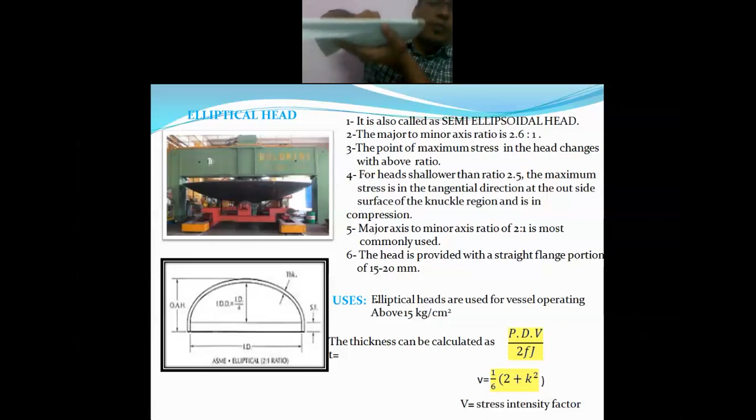In this figure, there is a big machinery which is provided, which is going to put a dishing that has been done. That means for a flat plate, I am going to hammer it continuously so that it is forming a dish, a curvature. So this dish is formed by continuously pressing it.

Similar videos are available on the net, and I request all of you to watch these videos.

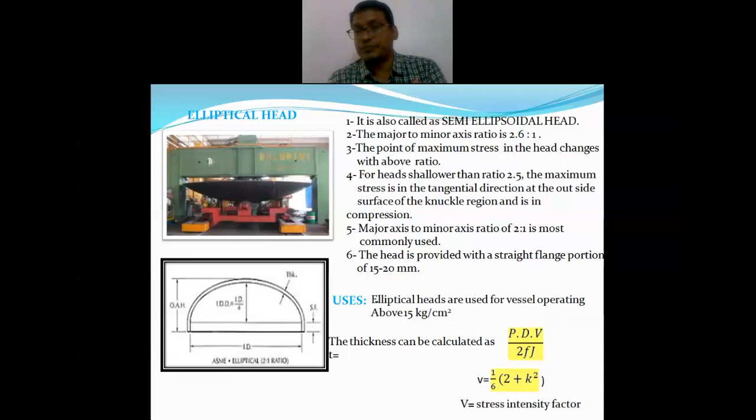The questions that can be framed, I have talked about in this slide. 4 to 5, even 4 to 7 questions can be framed on a single slide, so you have to study that in detail.

Now next, hemispherical head. It provides the maximum volume and requires just half the thickness of a cylindrical shell, that is PD upon 2FJ versus PD upon 4FJ. So the thickness calculation for hemispherical or spherical vessels is PD upon 4FJ, while for cylindrical vessels it is PD upon 2FJ.

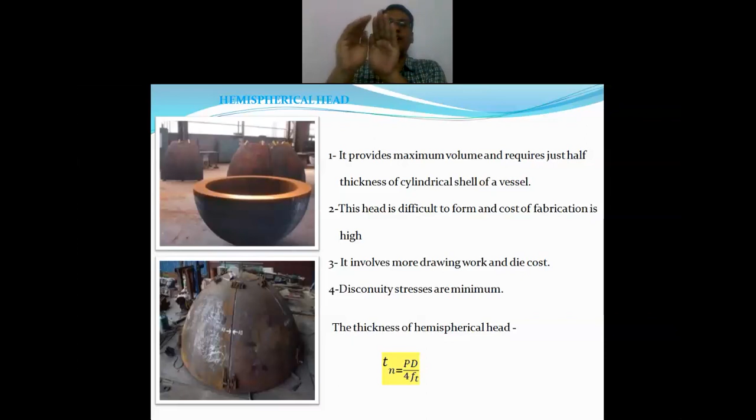This head is difficult for fabrication, and the cost of fabrication is very high for such heads. You can see in the second figure the certain curvature that is provided, and all these curvatures are welded to form a hemispherical head. Forming such a shape and then welding the different formed shapes becomes a complicated process, so its cost is more. Even though the thickness required is half, the cost of fabrication is much more than for torispherical and elliptical heads.

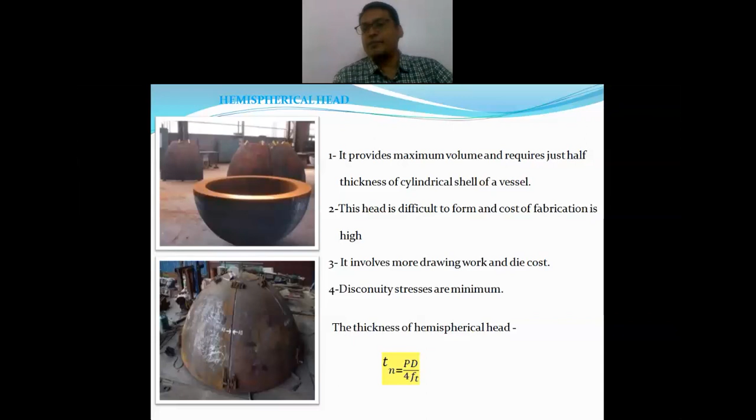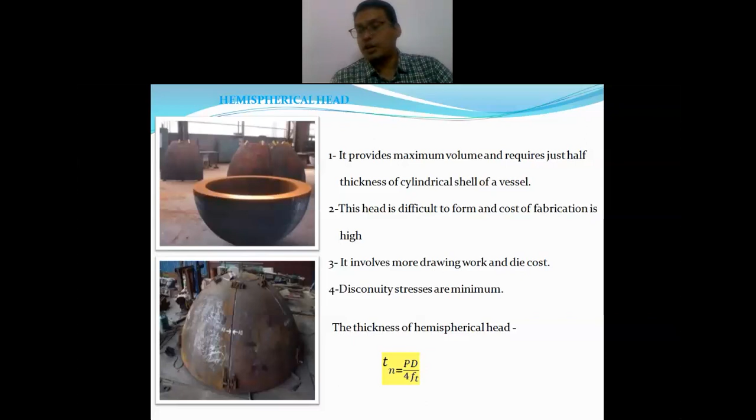So they are used for special purposes. It involves more drawing work and die cost. Discontinuity stresses are minimum and thickness is minimum - these are the advantages. However, the cost of fabrication is a major disadvantage for hemispherical heads.

Now next is the conical head. Conical heads are commonly used as the bottom section. These bottoms are used at evaporators, at the bottom of evaporators where the concentrated liquids are taken out.

It is also used for silos, at the bottom that can be used - hydrocyclones, silos. Now what are silos? They are the big storage tanks for solids. In industries, if you want to store polymeric chips or grains on an industrial scale, big silos will be there, and at the bottom you have a conical shape.

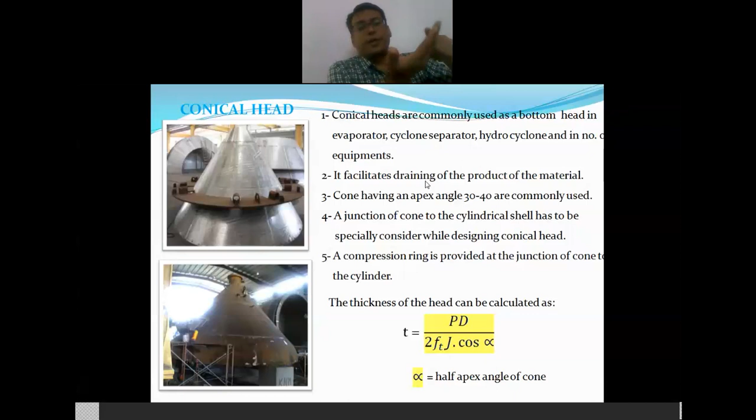Generally 60 degrees is used. The cone having an apex angle of 30 degrees is commonly used - this is half the angle I talked about. If the total angle is 60 degrees, the apex angle (total angle of the cone) is 60 degrees, and half the angle is 30 degrees. At the bottom, alpha, which equals half the apex angle of the cone, is generally taken as 30 degrees.

Then the junction of the cone to the cylindrical shell has to be specially considered while designing the conical head. A compression ring is provided at the junction of the cone and the cylinder, where certain rings can be provided.

The thickness calculation uses the same formula, PD upon 2FJ, modified by a factor of 1 upon cos alpha. Sometimes it is M, sometimes it is V. By this factor of 1 upon cos alpha, your thickness is going to increase.

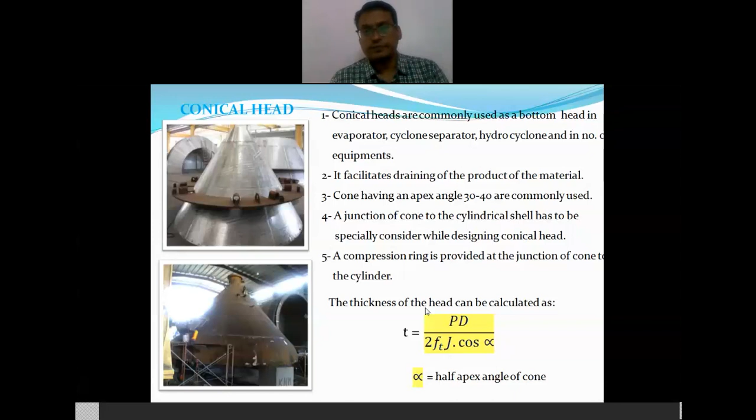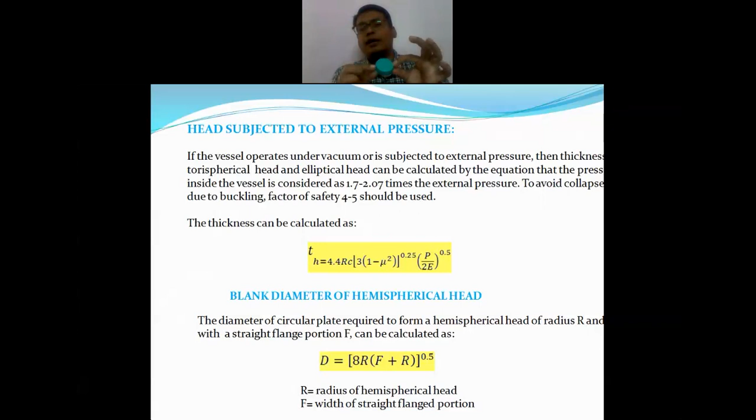Now there is another term, the blank diameter of a hemispherical head. What is the blank diameter? To form such a head with this diameter, I will require more length. So the diameter of a circular plate that is required to form a hemispherical head, torispherical head, elliptical head, or dished head of a certain radius with a straight flange.

Even though I am using this thickness plate, I can only provide effective diameter with this only, because some amount of the material will be required for the bending or curvature, and a certain length will be required for the straight flange portion. So straight flange portion of 15 to 20 millimeter, that is 2 centimeters. Then a certain curvature which is going to provide a knuckle radius, and then the dished head, that is the crown radius.

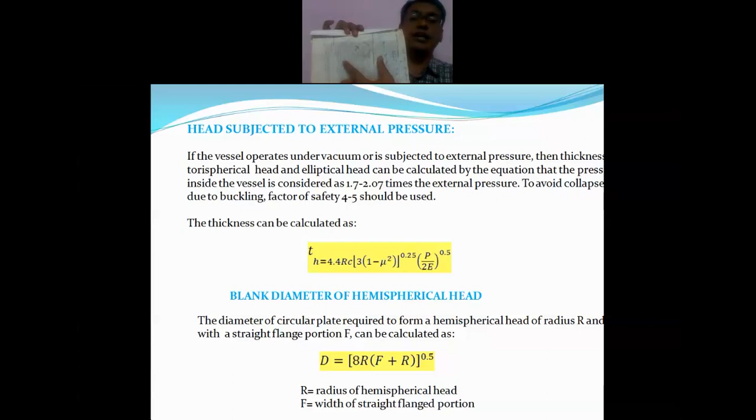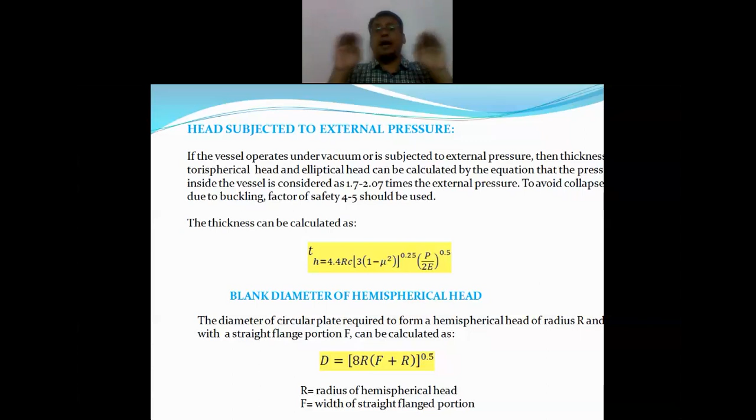Crown radius, knuckle radius, that will be there everywhere. Even though the curvature, that is nothing but a curvature. In ellipsoidal, that is the major axis to the minor axis, but there are also curvature. The upper curvature is having a higher radius, and at the end the radius is less.

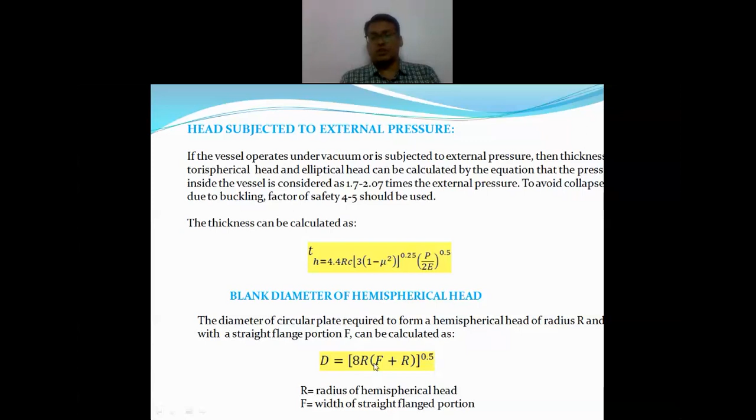So blank diameter is nothing but the diameter of a circular plate required to form a hemispherical head of radius r and with a straight flange portion f. For this hemispherical head, the calculation of the diameter, we are using this formula, where f is the width of a straight flange portion, also called SF, and r is the radius of the hemispherical head.

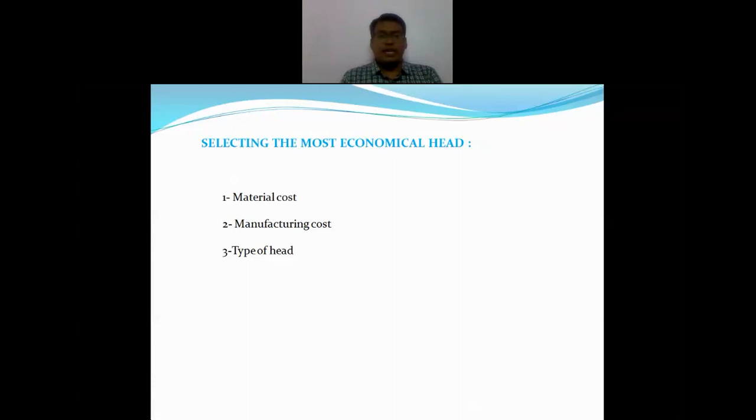Then how to select the most economical head? That is based on the material cost, manufacturing cost, and the type of the head. What is the purpose?

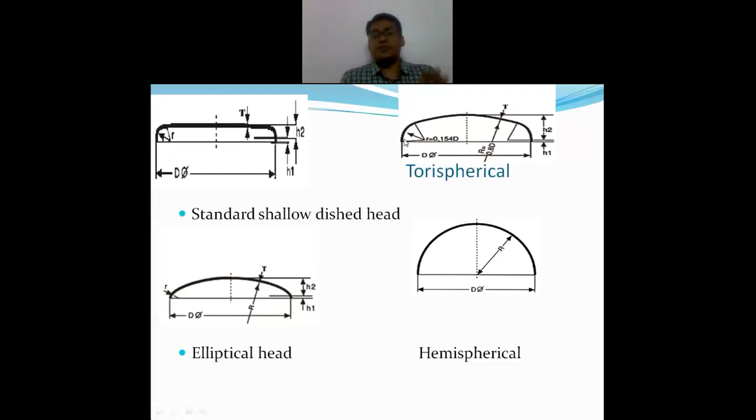While drawing, you have to understand the different concepts also. Similarly, draw elliptical head, hemispherical head, and the conical head.

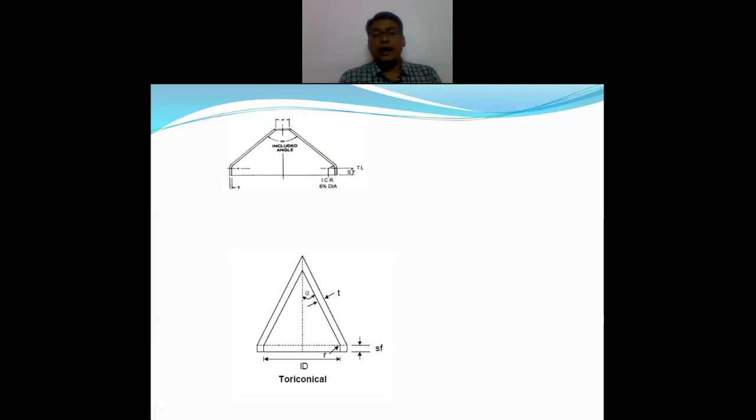Now in this figure, alpha is shown in both figures, but in the upper figure the alpha is complete, and in the bottom figure alpha is half the apex angle. You have to understand this half the apex angle that is used in the formula 1 upon cos alpha, where alpha is the half the apex angle, and then you can have a straight flange portion.

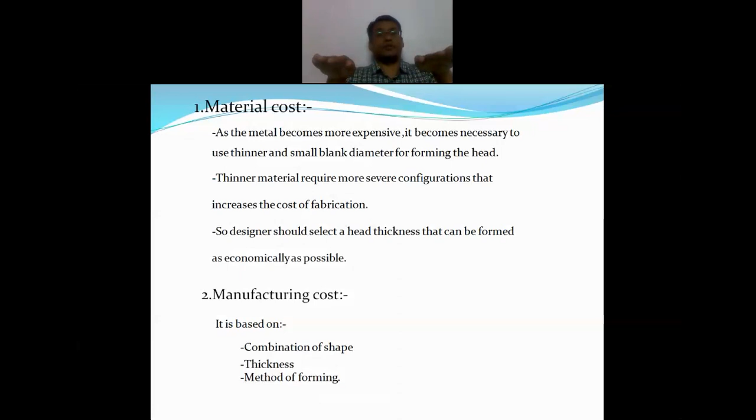Then the economic head. As the metal becomes more and more expensive, it becomes necessary to use the thinner material and the small blank diameter for forming a head. This means the basic material cost will be taken into account. Minimum thickness and the minimum plate that will be required.

Then the thinner material requires more severe configurations. You can think that the hemispherical heads are with the minimum thickness. That is what the thinner material requires more severe configuration, more severe curvatures are required.

Now here you have to optimize between the curvature and the thickness, which is nothing but the cost of fabrication. So the designer should select a head thickness that can be formed as economically as possible.

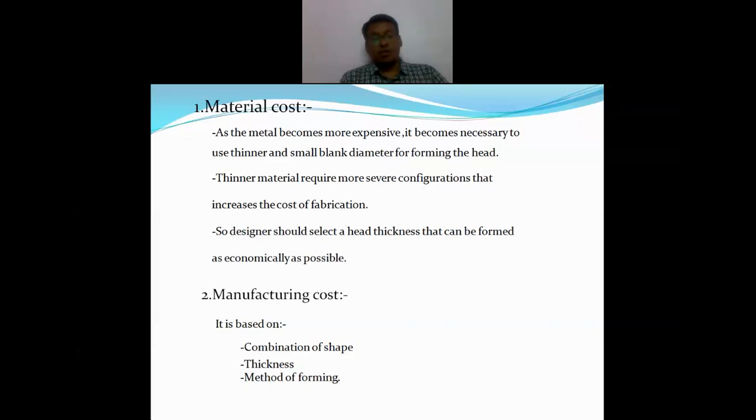Then manufacturing cost is based on a combination of shape, thickness, method of forming, then the types of the head, that is related to the selection and economic cost. Generally the hemispherical, torispherical, and elliptical heads are commonly used for process equipments. Then the hemispherical head is used for special purpose because it is very costly and difficult to fabricate.

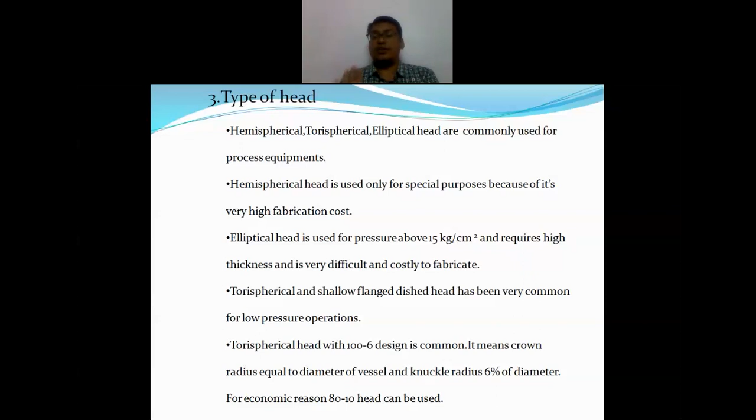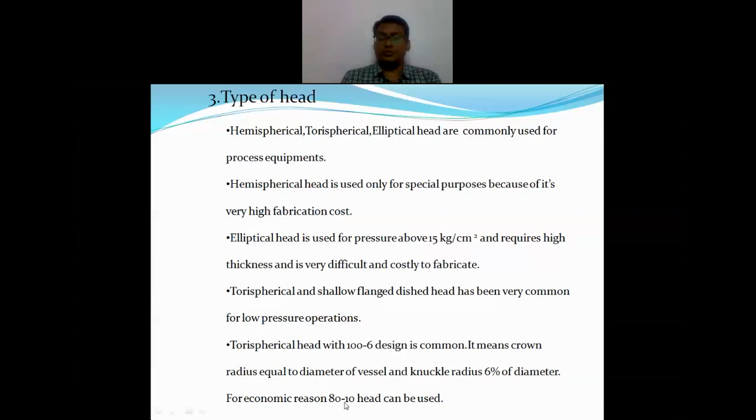For economic reasons, 80 to 10 heads can be used. So you can see in this figure the different shapes, different dishing that has been provided. These are simple figures, but you have to look at them in detail so that you can understand the dishing.

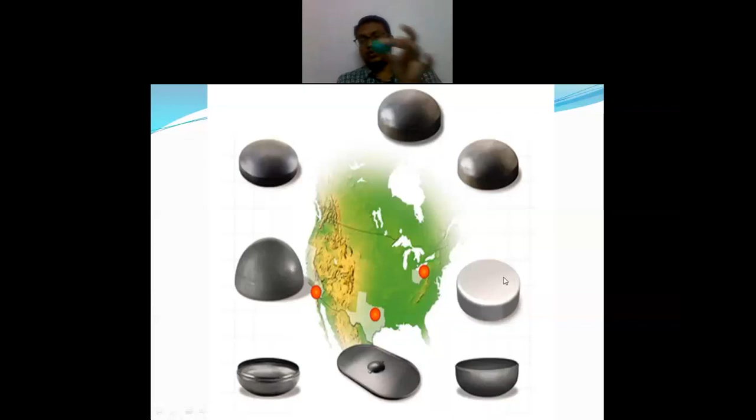This one is more or simply a flat plate similar to your cap, and this is most easy to fabricate. Then as you are going up, more curvature has been provided, and proper curvature has been provided in the corner, meaning knuckle radius.

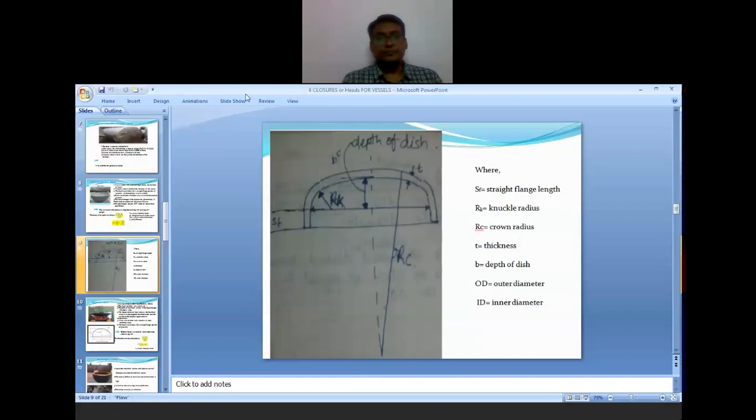Then hemispherical head, and this is simply the flat head. So these are the different types of heads that are there.

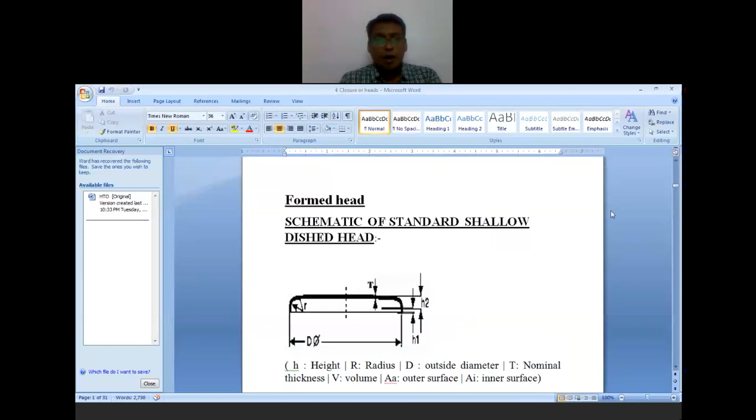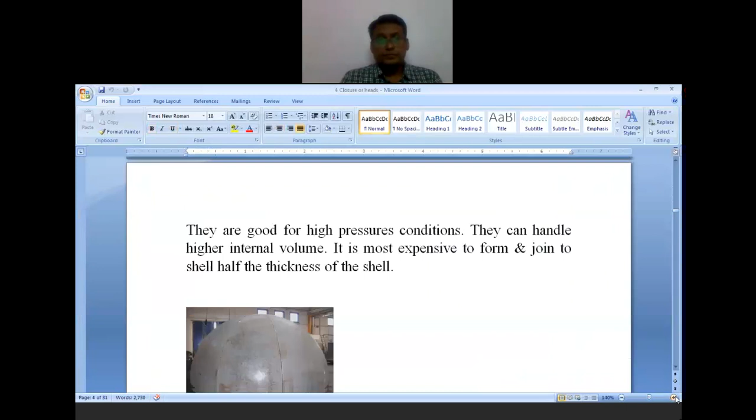Now we will see the numerical associated with this.

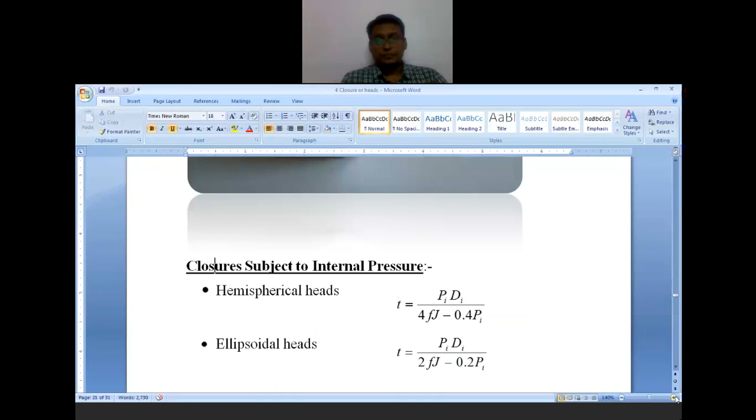Coming to the formulas. Now the hemispherical head formula is in terms of the internal diameter. Or you can simply use PD upon 4FJ, or PDi upon 4FJ minus 0.4P. Similarly, you can write it for the outer diameter also.

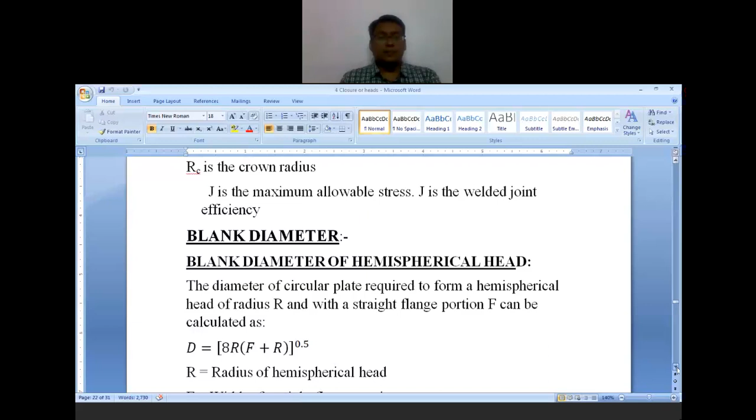Then the formula related to the elliptical head. Then the torispherical head, here RC is the crown radius. Then the blank diameter, this is the same as we have seen before.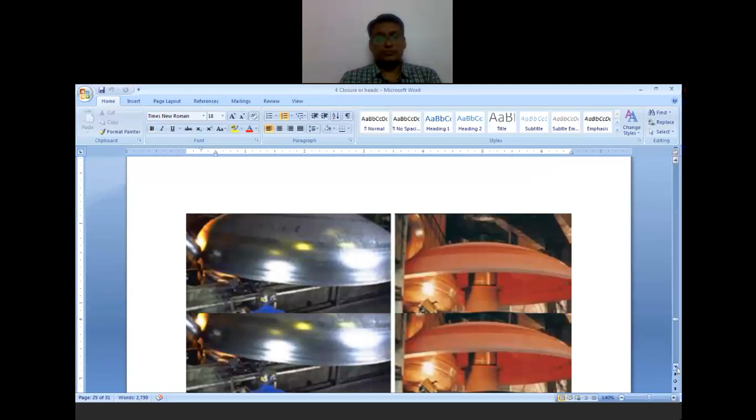This is how fabrication is done in the industries. Look at the second figure, a big head being formed, and here a big industrial scale hammer that is used for dishing. A certain roller is also provided, and it is increased at its temperature. That is why it looks red.

The temperature is more. As the temperature is more, the fabrication becomes more and more easy. This support is for rotation of the dish. This ball is for providing the dishing.

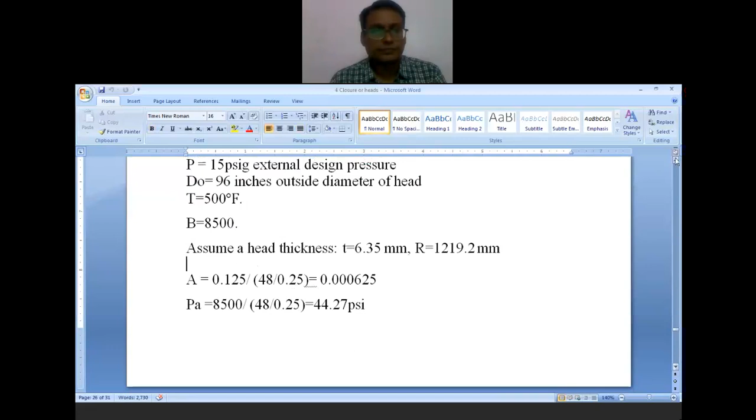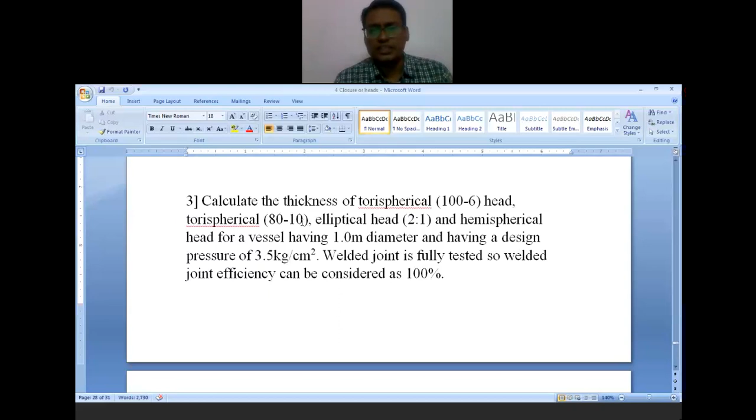Now consider this numerical: calculate the thickness of a torispherical head with ratio 100-6, another torispherical head with ratio 80-10, an elliptical head with ratio 2:1, and a hemispherical head, for a vessel having 1 meter diameter and a design pressure of 3.5 kgs per centimeter square. The welded joint efficiency is 100%.

If permissible stresses are not given in the numerical, you can take permissible stresses as 800 kgs per centimeter square, 900, 1000, 1200, or up to 1400 kgs per centimeter square for the material of construction. You can assume this only when it is not mentioned in the numerical.

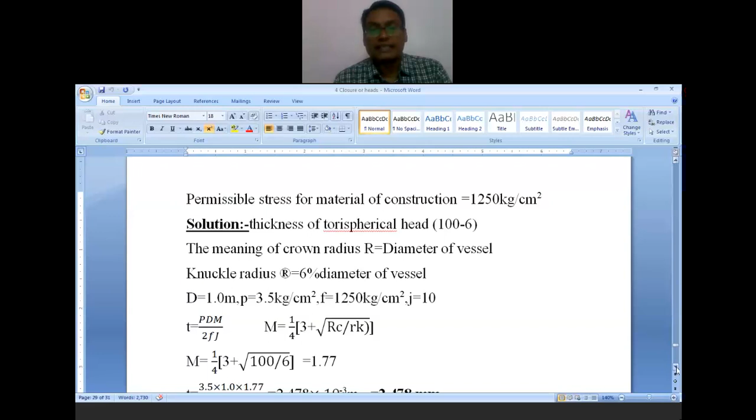Now the vessel has a diameter of 1 meter, and the torispherical head ratio mentioned is 100 to 6. That means the crown radius RC is equal to the diameter of the vessel, when this ratio is provided as 100.

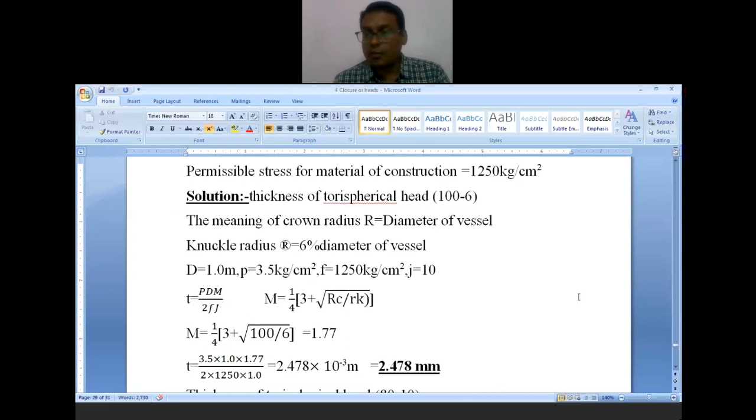Now come to the second part. The thickness of a torispherical head with ratio mentioned as 80-10. So the crown radius will be 0.8 times into 1, where 1 is the vessel diameter. So 0.8 times the vessel diameter will be the crown radius.

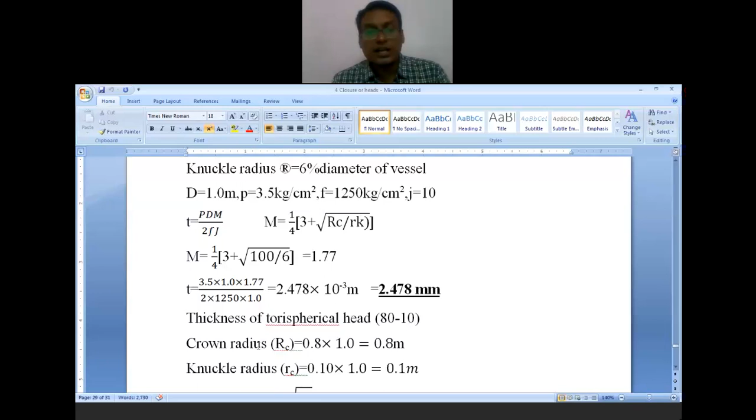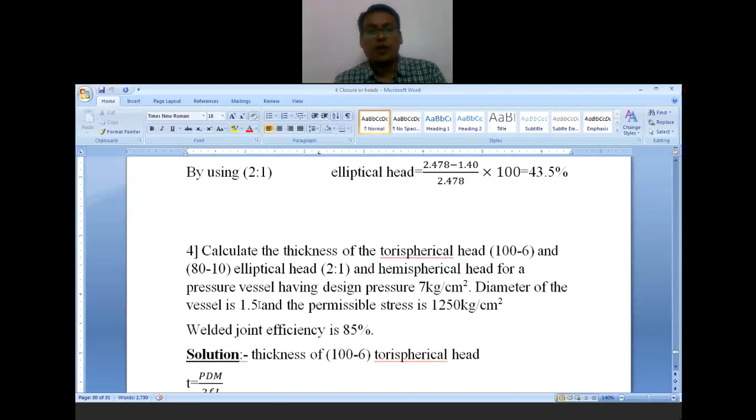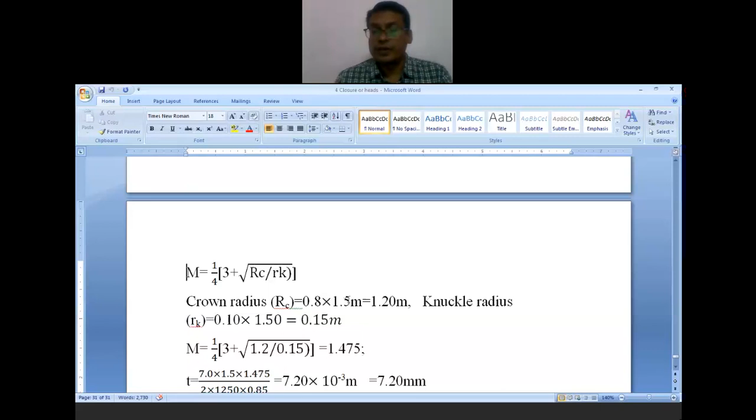Now see the next example. Here the vessel diameter is 1.5 meters. So crown radius will equal 0.8 into 1.5 meters, for the 80-10 ratio case, where 80 becomes 0.8 times the vessel diameter. In the earlier example the vessel diameter was 1, but in this second example it is 1.5, so that is what gets multiplied.

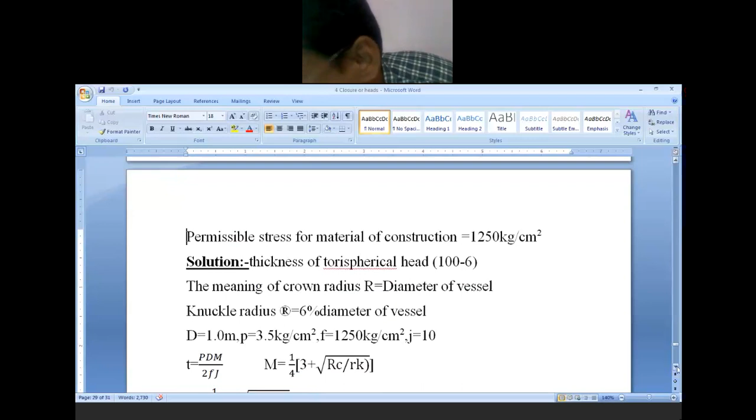J is the welding efficiency.

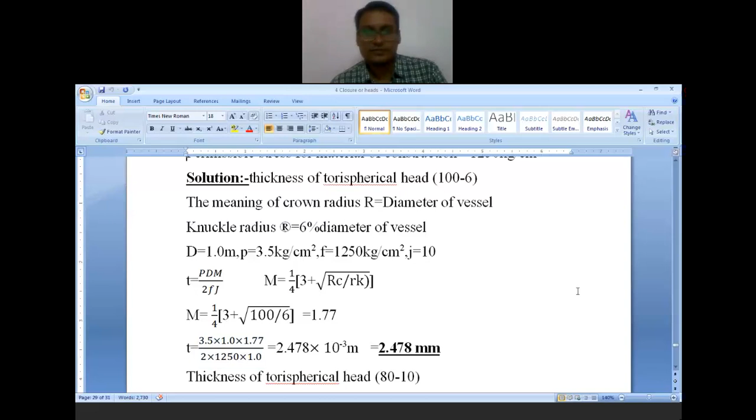Now the formula is thickness which is equal to PDM upon 2FJ. Did you understand that, RC and RK? Yes sir. Did those who asked about the difficulty understand it?

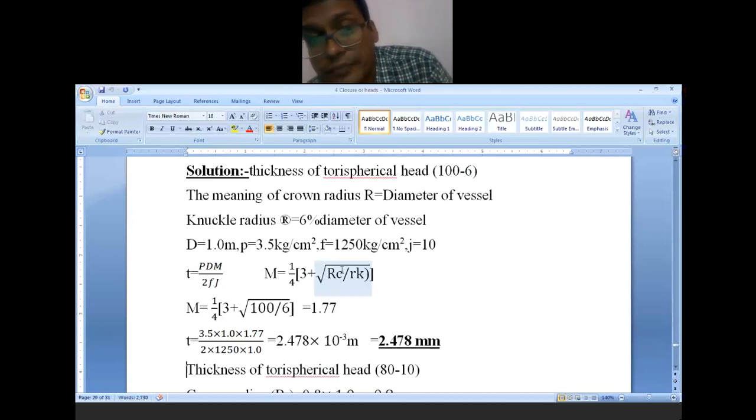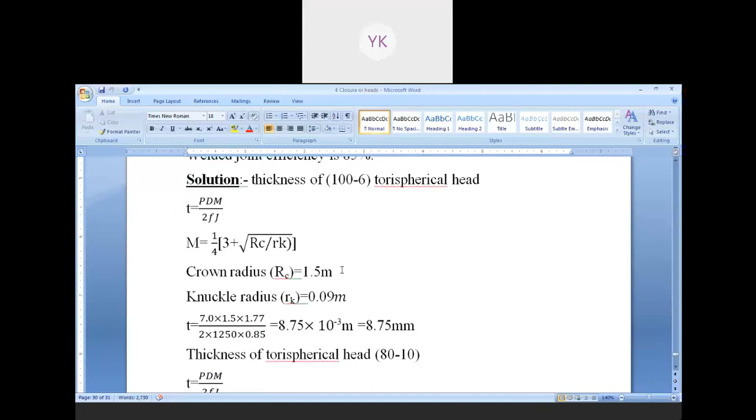See, in this numerical the crown radius calculated here, the crown ratio given is 80-10. This ratio is given in this example and the vessel diameter is 1.5. So it's multiplied by 0.8 to the vessel diameter. 1.5 is the vessel diameter and the ratio mentioned is 80. So instead of 80, it's 0.8, that is the 80%.

80% of the vessel diameter. How do I have to write 80% of the vessel diameter? 0.8 multiplied by the vessel diameter. 80% of the vessel diameter - how can I write it? 0.8 multiplied by the vessel diameter. Right?

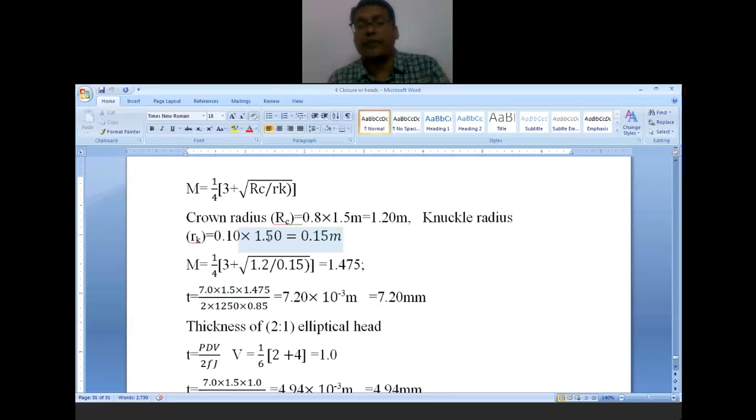So similarly, knuckle radius is 10% of the vessel diameter. 10% of the vessel diameter, that is 0.1 multiplied by the vessel diameter. Here if vessel diameter was 1, I would have multiplied by 1. In this example numerical, vessel diameter is 1.5. Let's see the next example similarly.

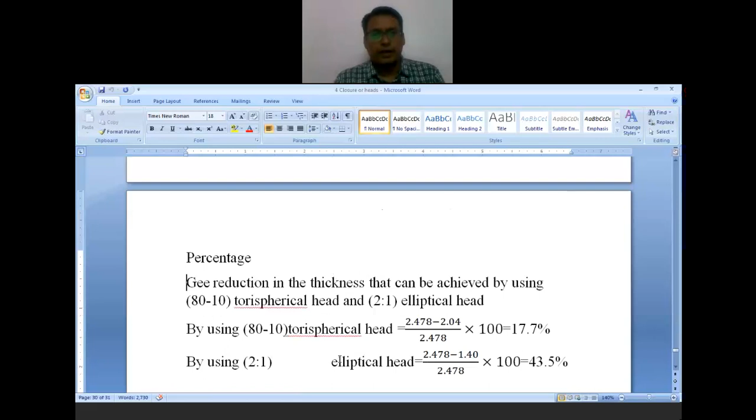Now how to calculate m? m is nothing but 1/4. We need to remember the formula for m, otherwise we tend to write the wrong formula for m in the exam. m which is equal to 1/4 of 3 plus root of RC upon RK.

Here you don't need to multiply, you can simply write the ratio also. 100/6 multiplied by 1, below also multiplied by 1 and numerator also multiplied by 1, so you can eliminate that. But while using this formula for calculation of the thickness, 3.5 is nothing but the pressure into 1, that is the vessel diameter, PD into m. The values of m are generally standard: 1.77, 1.44, 1.43, 1.44 - these are the general standard values that come, because the ratios are only 100/6, 80/10, 90/10 or 98. These ratios are more or less the same, so the numerical values of m also come out similar.

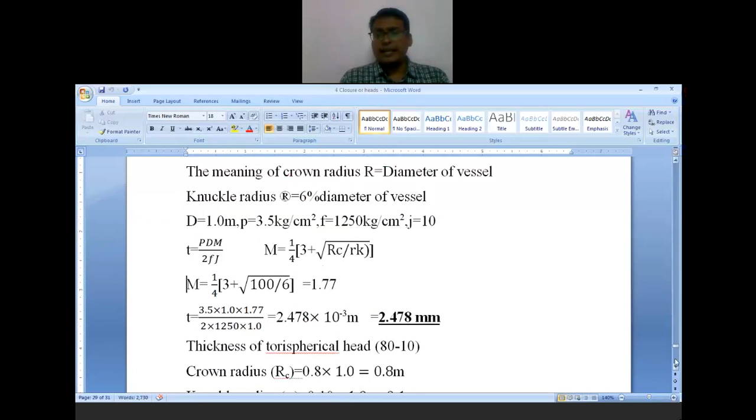Then the second calculation, that is related to the torispherical head with 80/10. Here this crown radius is 0.8 into vessel diameter, that is 1, knuckle radius 0.1 into vessel diameter 1. So similarly now you can see the difference in the value of m. In the above numerical, m was 1.77, here it's 1.457. So your final thickness comes out to 2.04 mm. The one above is 2.47.

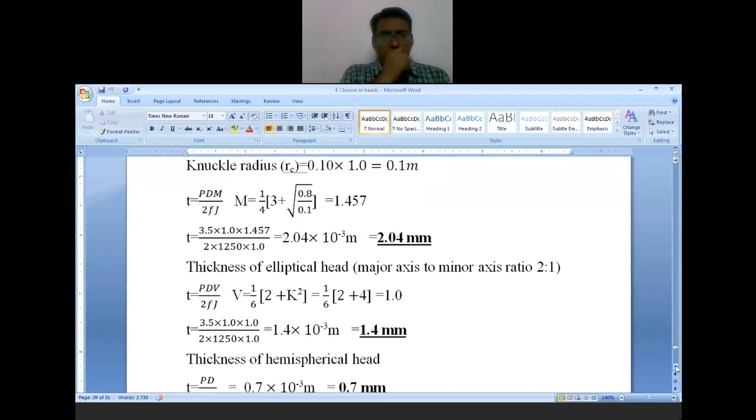For the thickness of an elliptical head with major axis to minor axis ratio of 2:1, V is calculated as 1.0. In case the thickness of the vessel and the thickness of the head are the same, the thickness is calculated as PD·V upon 2fj. This is 3.5 into 1 into V, where V is 1.0, upon 2f and j is 1.0, which equals 1.4 into 10 to the power minus 3 meters, that comes out as 1.4 millimeter.

And if a hemispherical head has been used, then the thickness is PD upon 4fj. Now comparing all these thicknesses.

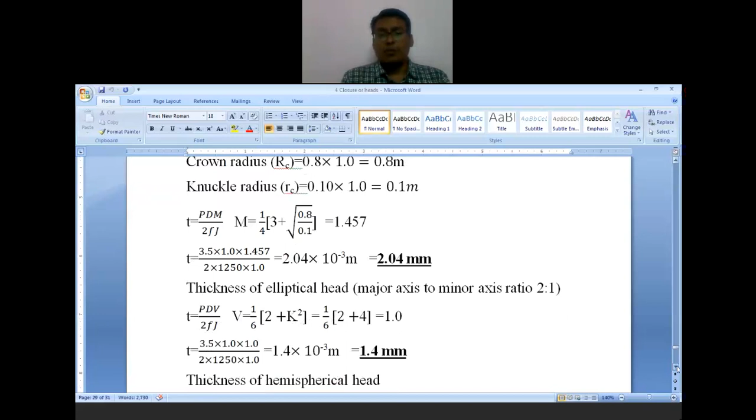Now if I calculate the thickness of a vessel in this numerical, what will it be? It will be the same as 1.4 millimeter, because PD upon 2fj. I am using the same formula as for the elliptical head. The value of V here is 1, because the ratio is 2:1.

Now if I change the ratio to 2.6:1, the value of V is going to change, it will increase. So my thickness will also increase.

So for a hemispherical head, you require a minimum thickness of 0.7 millimeter. Then the thickness of the vessel is 1.4 millimeter. In this case, the thickness of an elliptical head is also the same as that of the cylindrical vessel, because the ratio is 2:1. Then with the 80/10 ratio, the thickness comes out as 2.04.

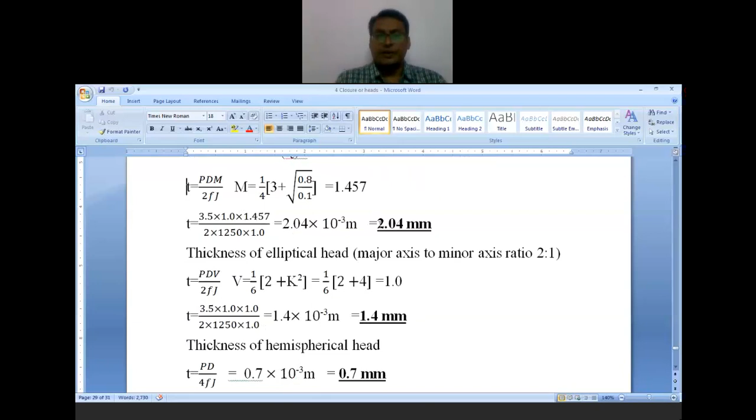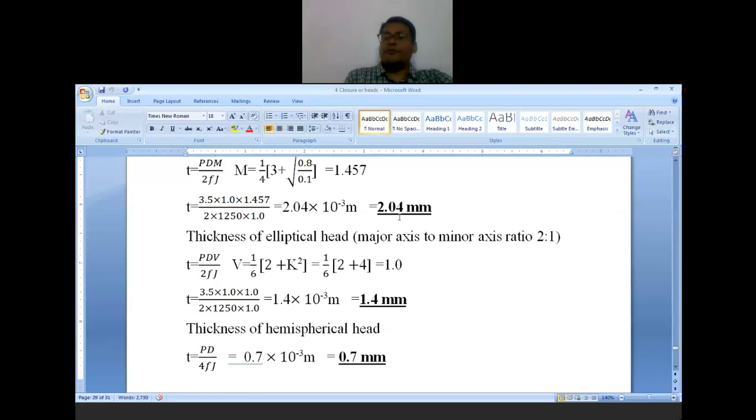But in actual practice, I cannot use this 0.7 millimeter thickness, neither for fabrication nor for welding purpose. The minimum thickness required is 5 millimeters for the purpose of welding, so that welding is properly done. So even though my calculated thickness comes out as 0.7, 1.4, 2.04 or 2.478, I am going to use a thickness of 5 millimeter. This has to be mentioned at the end.